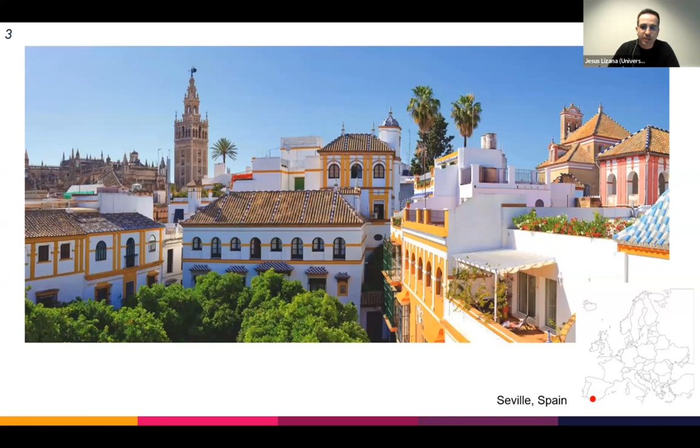First, I would like to talk about where I come from. I am from Seville in southern Spain, a lovely place where you can find amazing food, fantastic weather, but this summer with some days reaching temperatures higher than 45 degrees Celsius, something that we never saw before.

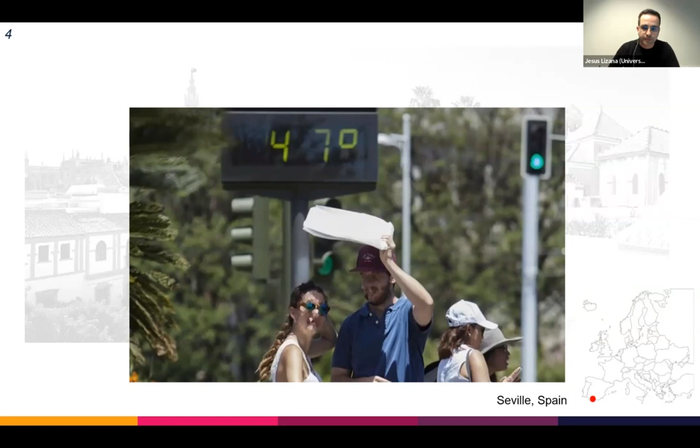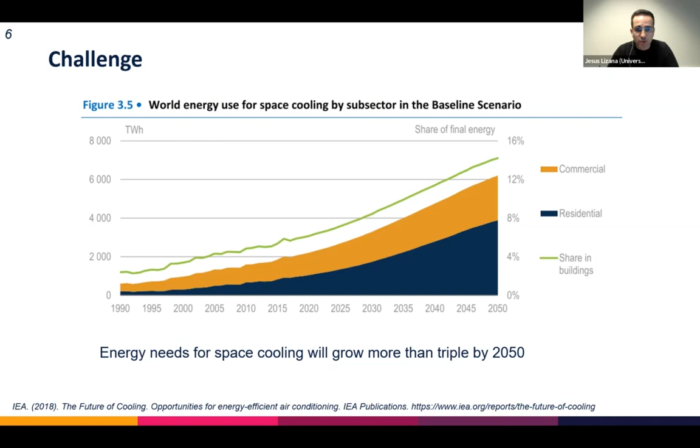This is because the way that we understand cooling is changing globally. Even though the highest request for cooling is located in the tropics, climate change is increasing the cooling demand globally. Cooling demand is expected to be more than triple by 2050, with heat events occurring more often and longer.

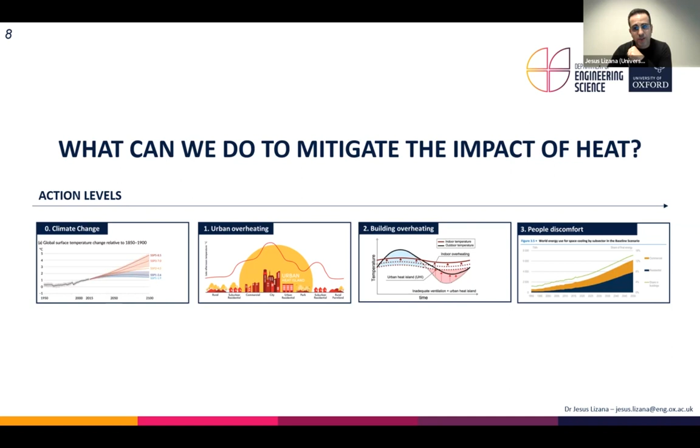So here we have the following question: what can we do to mitigate the impact of heat in the built environment? To address this question in the Future Cooling Program, we are working together at different levels in order to mitigate climate change and global warming, reduce urban overheating, mitigate building overheating, and address people's discomfort more efficiently, decreasing energy needs. In this presentation, I will focus on how to address sustainable cooling at these three last scales.

We need to consider that the adaptation of the built environment to warmer temperatures requires the deployment of the best available cooling techniques and technologies. Right now, a wide portfolio of solutions is already available to address cooling efficiently.

These cooling solutions can be classified using 5 key concepts: solar protection, heat prevention, heat modulation, heat dissipation, and heat removal. The first one, solar protection, targets the reduction of solar gains into the building envelope and openings.

Heat prevention is based on the reduction of internal heat gains, mainly from lighting or appliances, insulation, and the improvement of air tightness of the building.

With heat modulation, we target to increase the thermal energy storage capacity of the building to modulate heat. And with heat dissipation, we target to use an environmental heat sink at a lower temperature in order to dissipate heat using a low energy technique.

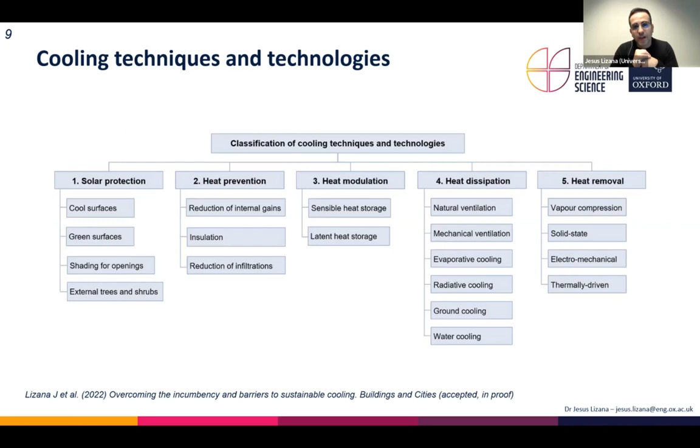In this case, we can use ventilation, evaporative cooling, radiative cooling, ground cooling, or water cooling. And finally, all the active technologies that we can find for heat removal.

Despite this extensive portfolio, the main problem is that the easiest and fastest response to address cooling still lies with the installation of an air conditioning unit, commonly regarded as the sole technological solution.

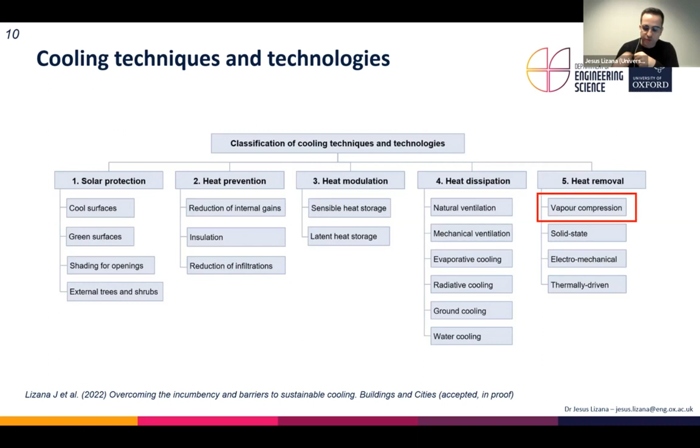This dominant market technology, the vapor compression refrigeration system, has become a long-standing incumbent in the cooling industry, creating barriers to innovation and transition, since cooling solutions are largely understood to take this particular form worldwide.

These barriers can be grouped into 5 priority areas. This consists of, in the first step, building energy policies exclusively based on energy efficiency.

In a second step, air conditioning only by temperature control rather than using other comfort parameters. The third one, building-centric design instead of occupant-centric design. The fourth one, focus on product-based business models instead of a product-service model. And finally, all the attention on the standard operational phase of cooling.

These 5 groups of barriers are fully explained and detailed in our latest research article recently published in the journal Buildings and Cities. It's now approved, and hopefully next week it will be available online.

I say this because in this presentation, I don't want to talk about problems—I want to give solutions. In the next slides, I am going to summarize the right steps in the right order that we need to address sustainable cooling, and how we can use these steps to overcome these main barriers, where the vapor compression air conditioner should be part of the solution and not the sole solution.

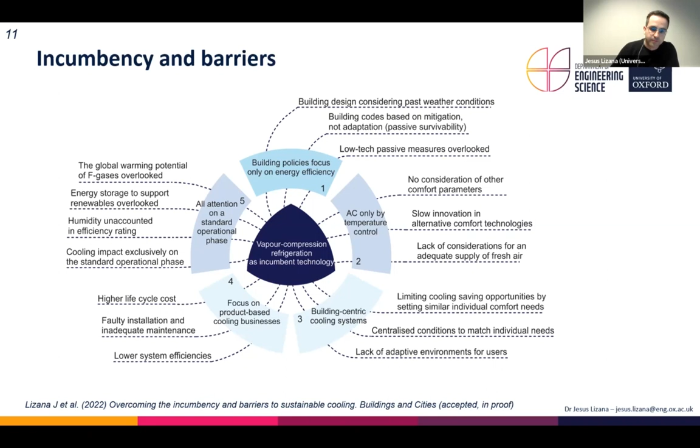The right steps to address sustainable cooling are 8, and implemented in the right order, they can increase the heat resiliency capacity of the building, downsize cooling systems and cooling needs, and finally mitigate resource consumption and the environmental impact associated with cooling.

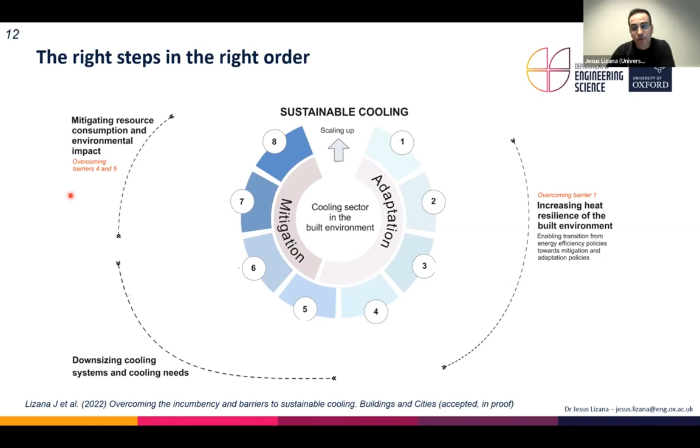These steps should be implemented considering current and future weather conditions, and considering heating and cooling as a whole in the building design process. The first 4 steps are related to solar protection, heat dissipation, heat modulation, and heat prevention, following this order.

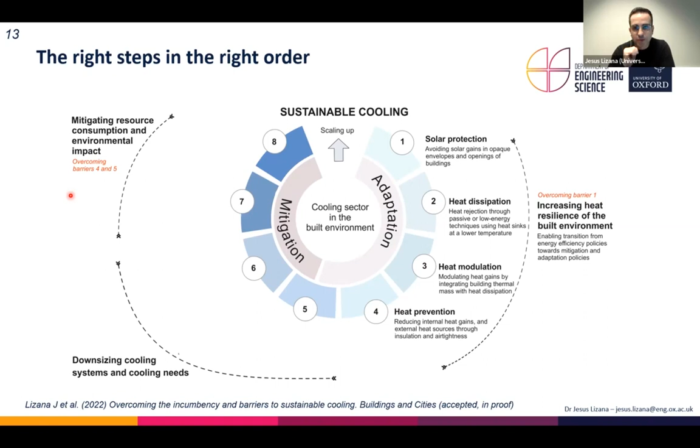These solutions are well known, but to be efficiently implemented, we need to overcome the first barriers group. First, building policies should move beyond energy efficiency metrics and start considering indicators based on the passive performance of buildings, or passive survivability - meaning considering buildings without air conditioning, using indicators such as discomfort hours.

This is something we did this year, published in Applied Energy, where we analyzed the mitigation potential of different passive cooling solutions from two different points of view: on the one hand, reducing discomfort hours in buildings where we don't have an air conditioning system, shown on the y-axis, and on the other hand, in buildings where we have air conditioning, shown on the x-axis.

So in this case, we are targeting reduction of energy consumption and energy savings, and in this case, we are targeting reduction of building overheating.

In the upper area of the figure, we find those solutions that create synergies in buildings with air conditioning and buildings without air conditioning. Here we find that the top solutions with the higher synergies are related to heat dissipation by ventilation or solar protection in roofs and windows.

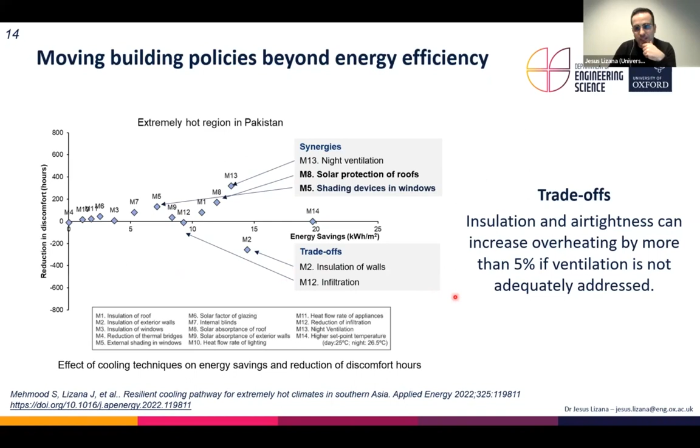However, we have important trade-offs with solutions to increase insulation or improve air tightness of the building. These solutions can reduce energy demand efficiently where we have air conditioning. However, in cases where we don't have air conditioning, measured from the point of view of these passive indicators, they will increase overheating even more if ventilation is not properly addressed. We also need to consider the real weather conditions the built environment is facing.

This is one example of the city of Seville in Spain, where I come from. Here we find the problem of the urban heat island, or urban overheating. This concept is associated with urban areas that are significantly warmer than the surrounding rural areas.

This is important because there is a big difference in weather data from official weather stations, most of the time located in rural or suburban areas, versus real urban climates. Most of the time we use exclusively weather data from these official stations to support the building design process. In this example of Seville, we see a temperature difference in some urban areas of up to 7 degrees Celsius.

Most of the time, these higher differences are located at night, as we can see here, where the magnitude of the urban heat island is much higher.

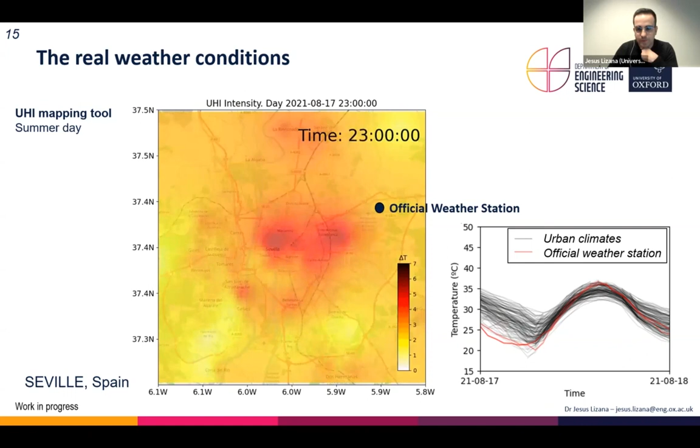This is important because it is not a problem only affecting outdoor urban environments, but also buildings and indoor spaces. Here I give one example. In this figure, we show the indoor temperature oscillation of the building compared with the outdoor temperature, in this case a well-designed building, so this will be the outdoor temperature oscillation and the indoor space.

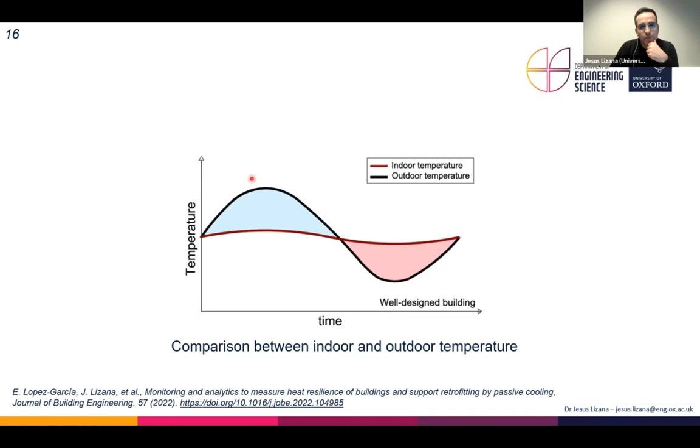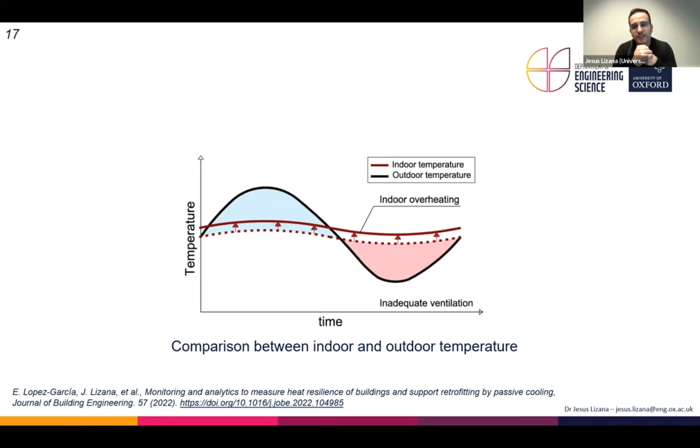First, if the building is not properly designed addressing these 4 steps correctly, overheating will increase by more than 5%. But additionally, if the building is located in one of these urban areas affected by the urban heat island, the indoor overheating will be even higher.

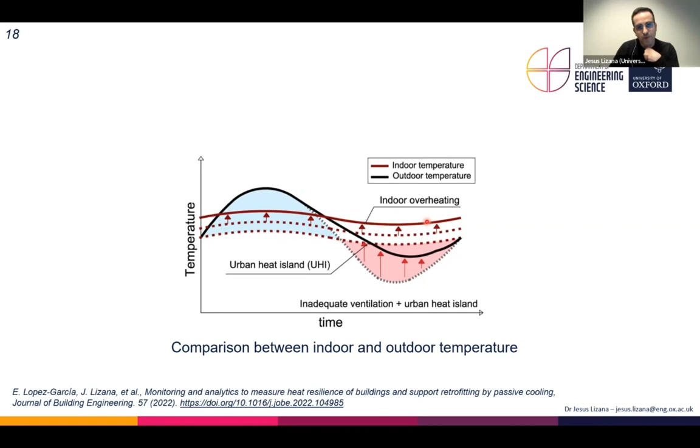As we can see, at night, where we have the highest magnitude of the urban heat island, we are decreasing the heat dissipation potential of the building, increasing overheating even more. But how much higher can it be?

In this previous study, we calculated and demonstrated how urban overheating can increase energy demand by close to 20% in buildings where we have access to air conditioning. But at the same time, if we use passive indicators evaluating the heat resiliency or passive survivability of buildings, we see this urban overheating can increase discomfort hours by more than 30% in buildings, for example, where we find fuel poverty.

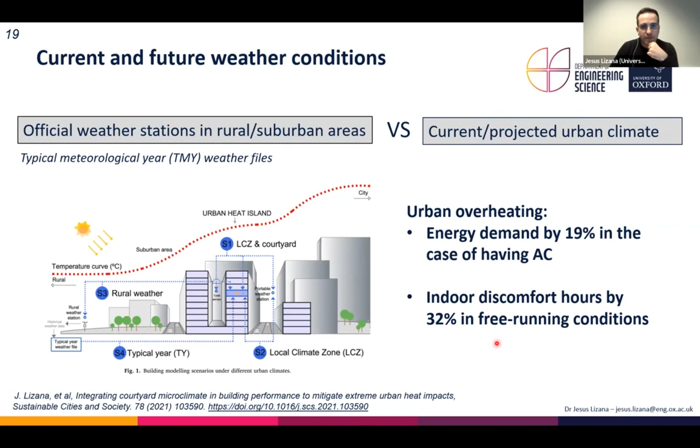So we need to start addressing these 4 steps properly, overcoming existing compliance tools used to address building design, for example SAP in the UK or HULC in Spain. And if we address these steps efficiently, we have a great chance of eliminating the need for air conditioning.

Even if not, we have different alternatives that we can implement to reduce even more the cooling needs and downsize the cooling system. These are related to the implementation of more comfort variables to create comfort, and also by recognizing that we all have different individual cooling needs through an occupant-centric design.

We need to realize that comfort is not only temperature. Using more comfort parameters, such as air speed or radiant temperature, we can modify the temperature range or comfort zone in which people feel comfortable. This is quite interesting for cooling.

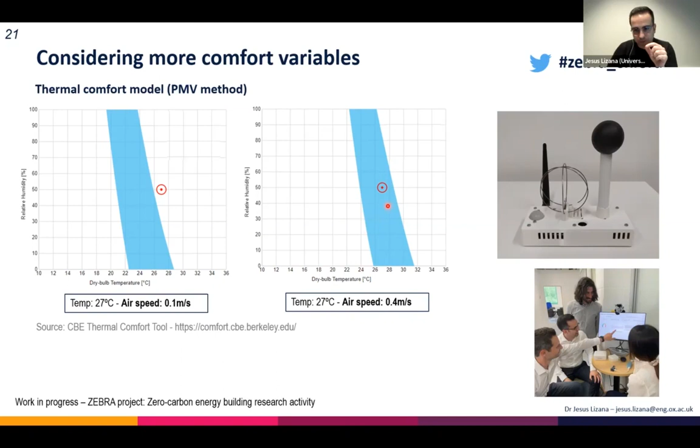However, if we increase the air speed with the same dry bulb temperature, we are able to start feeling comfortable. This is quite interesting for cooling because we have a huge opportunity for reducing cooling demand and energy consumption only by using more comfort parameters. Because only by modifying the standard set point temperature by 1 degree Celsius higher, we can reduce energy consumption by close to 10%.

Additionally, we need to consider that all occupants will have different comfort requirements. It's important to start implementing adaptive environments, for example, introducing personal environmental control systems. The target is to expand even more the comfort range in which people feel comfortable, in order to reduce the centralized cooling needs of the building.

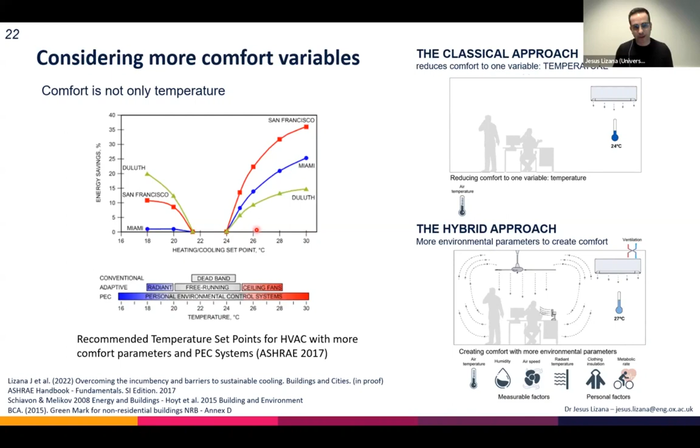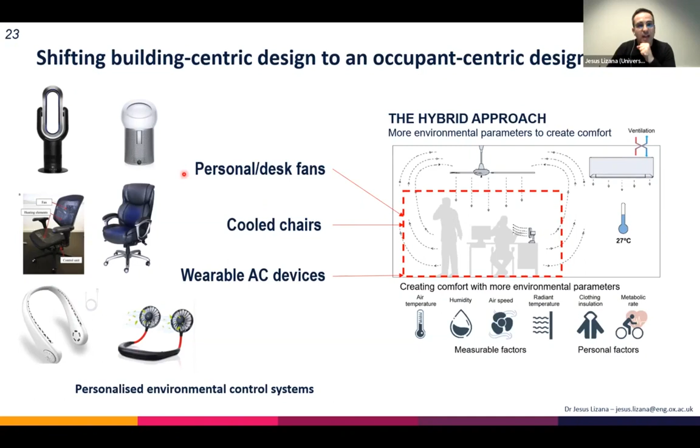This strategy can help even more to downsize centralized cooling systems, reducing peak cooling demand of the building, decreasing investment costs, and reducing energy consumption, mitigating operating costs. The idea is basically cooling people and not the buildings, by using more comfort parameters and implementing adaptive environments.

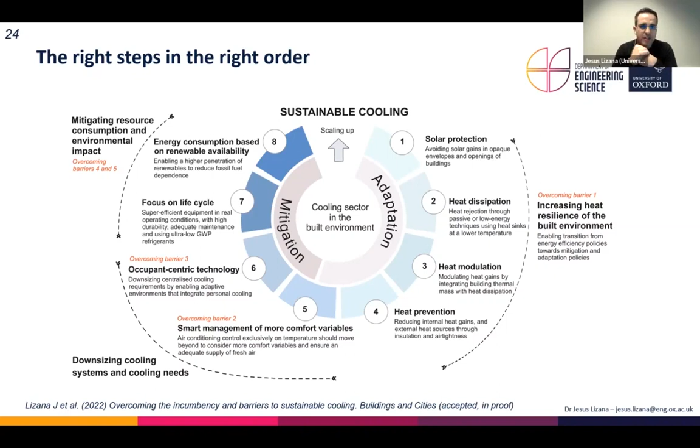The target is to shift from a building-centric design to an occupant-centric design. If after these six steps we still have cooling needs, we have two more steps that will help mitigate the energy consumption and environmental impact of cooling. They relate to focusing on the life cycle, selecting super efficient equipment in real operating conditions with high durability, adequate maintenance, and using ultra-low global warming potential refrigerants, and integrating more renewable energy to reduce fossil fuel dependence.

Regarding the focus on life cycle, business models should move from a product-oriented system to a product-service system—for example, adding more features or services in the contracts, such as maintenance, repair, or replacement, in order to extend the product life cycle with longer durability and performance. In the next presentation, Dr. Giovanni Palafox will introduce more details about this.

Moreover, environmental consideration should go beyond the standard operational phase of cooling technologies. It's extremely important to start considering humidity's influence on system performance, something completely overlooked since none of the system efficiency metrics of cooling systems account for humidity influence. Also, the use of ultra-low global warming potential refrigerants should be a priority, since F-gases can leak from units and quickly accelerate global warming, up to 4,000 times more than carbon dioxide in the short term.

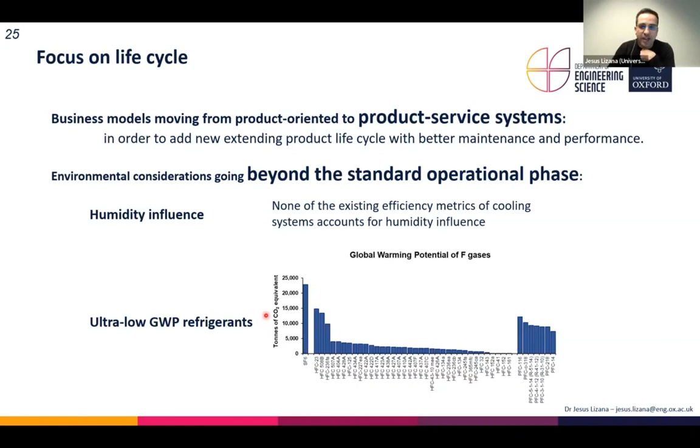Finally, to mitigate carbon emissions, we need to create green energy demand in order to integrate more renewable energy. Here, thermal energy storage and energy flexibility can play an important role, and this is very important in the case of cooling, since cooling flexibility can benefit from two important aspects.

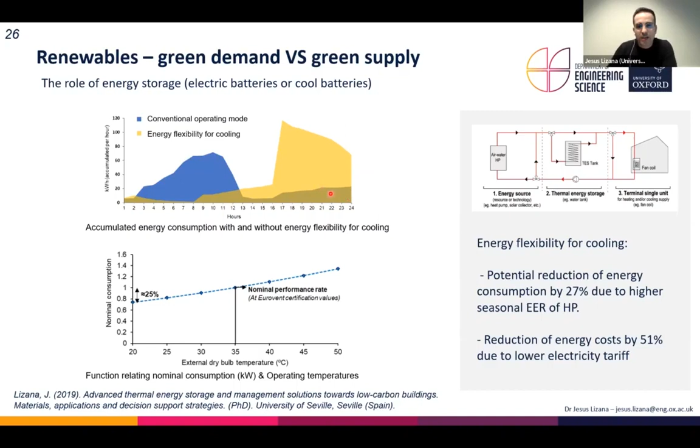First, if we operate the system in better operating conditions, for example at night where we have lower temperatures, we can increase the seasonal efficiency of the system by even more than 20%. If we combine this increase in seasonal efficiency with a lower electricity tariff, we can reduce the operating cost of the system by more than 50%.

Following these steps, sustainable cooling can be guaranteed. The most important thing I would like to transmit is that all these actions require time, require long-term planning. We will face some heat events in the summer, and you will remember this presentation with these cool concepts. However, the easiest and fastest response will be to buy an air conditioner. So it's important to start addressing these actions in our homes, and of course, considering heating and cooling as a whole in the building design process.

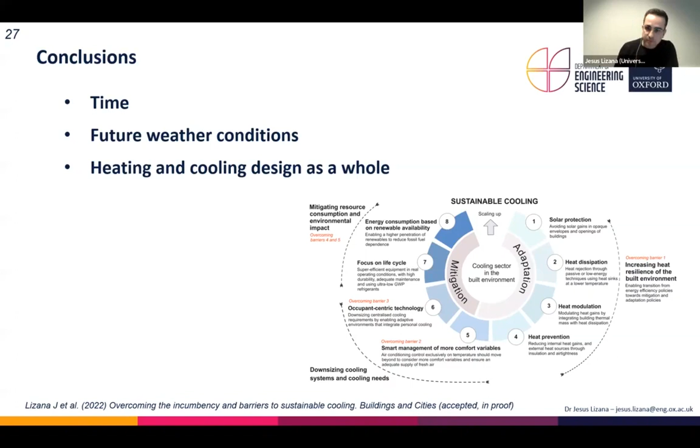And this is the end of my presentation.